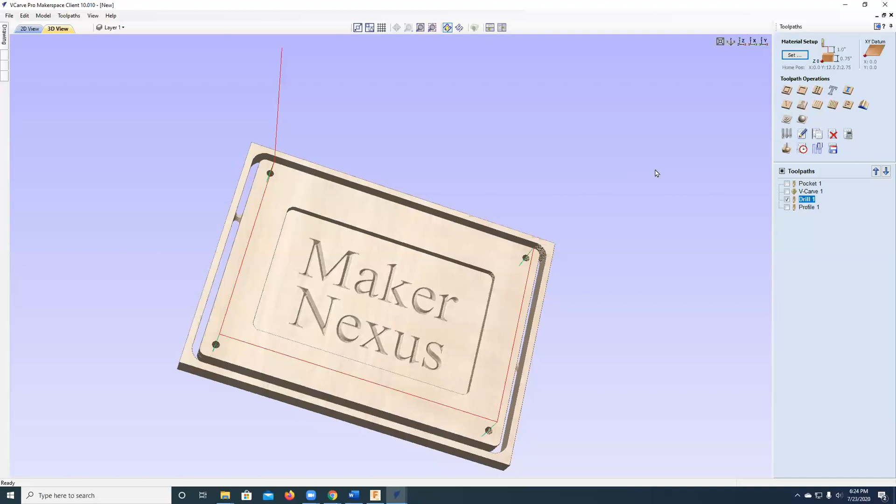All right, going to close that. We're going to start with a clean sheet. This is the splash screen when you download VCarve Pro or VCarve Desktop. This happens to be VCarve Pro.

If you take a look at the top, my version says Makerspace Client version 10.0. Normally, when you go to the help file and say about VCarve Pro, there's a space that says please enter your license code. Instead of a license code, if you enter the Makerspace code for Maker Nexus, which you can get from our Slack or by coming into the shop and copying it down, your copy of VCarve Pro trial version turns into a Makerspace version, which will work for basically forever. However, you will not be able to write tool paths. You'll only be able to create the tool paths, but not write out the code that makes the ShopBot go.

The desktop version of VCarve Pro is about $300 to $400, and the Pro version is $800, and the Makerspace version is free. So depending on your price point and your pain level, you can pick which one of those three you prefer. I prefer the Makerspace version.

Okay, so what we're going to do is a little bit of drawing. First thing we need to do is create a new file. I'm going to click on Create New File, and it's going to ask how big your workspace is going to be. This is normally how large the piece of wood, acrylic, polycarbonate, or whatever you're working with is. For today, let's say my piece of lumber is 12 inches wide, 9 inches tall, and 3/4 of an inch thick. I can work in either inches or millimeters.

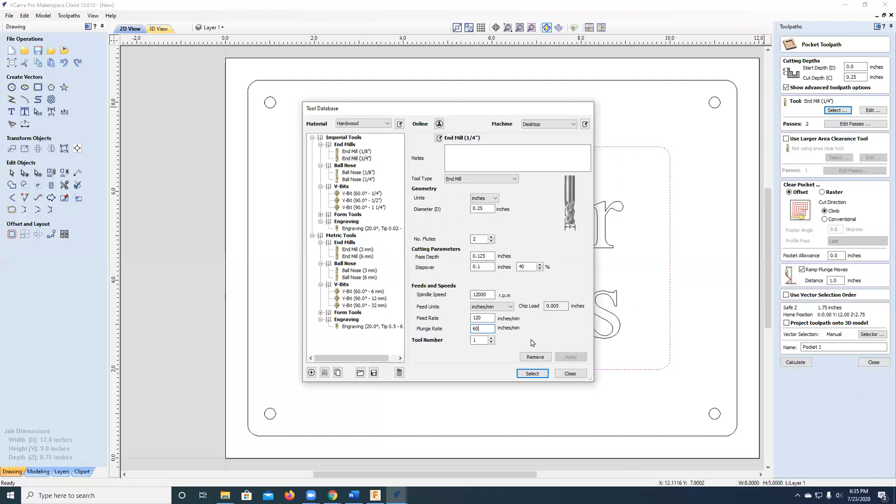Great, I'm going to select. So I've selected my cutting depth and my tool. Notice that it automatically calculates that there's going to be 2 passes. Doing the math in our head, we agree with that.

You have the opportunity to use a larger tool when you're clearing an area. This is an advanced topic we're going to skip at this point.

Next up we have is the strategy we use to clear out the pocket. We can either use offset or raster. Offset follows the profile, the outline of the geometry, and starts in the center and works its way to the outside. Raster goes back and forth, back and forth, or up and down, depending on how you select it. I like offset.

That's what I'm going to use. If you were really concerned, you could do both of them and compare which one takes less time and choose that.

Next section is what's called ramp. We have the opportunity to ramp into the part. So this means that instead of plunging straight down with the tool, I'm going to go at an angle, which again is kind to your tool and makes it last longer.

Okay, down here we have the opportunity to name what it is. I'm going to call it pocket 1 because I'm not feeling very creative today, but we could call it center pocket or clear or text pocket or whatever we want.

When I click to calculate, it goes out and figures out what it's going to do and gives me a graphic representation. Notice we went from the 2D view to the 3D view. Here's my 2D view, and here's the 3D.

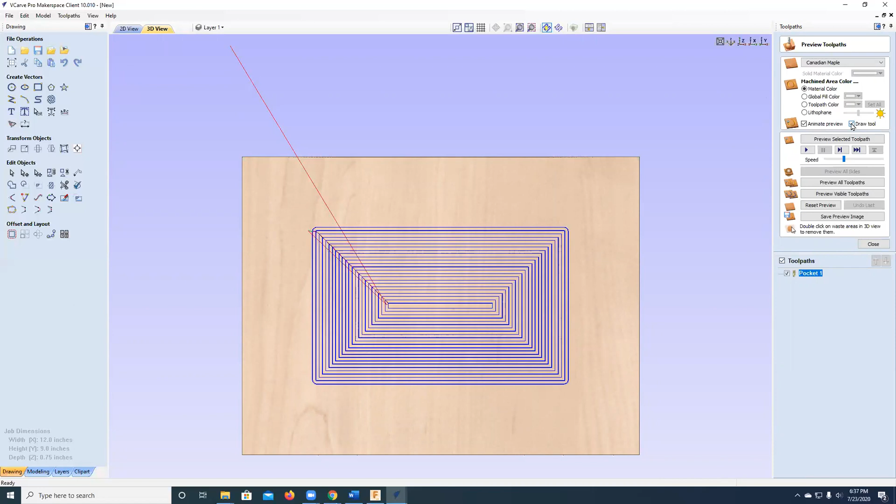And what I can do is I can actually use the simulator over here. It brings up the preview toolpaths submenu. And when I click on the play button right here, it's actually going to show me what it's going to do. I'm going to speed it up because I don't have all afternoon to watch the pretty movie.

But you can see that it clears the whole area and then goes back a second pass a little deeper.

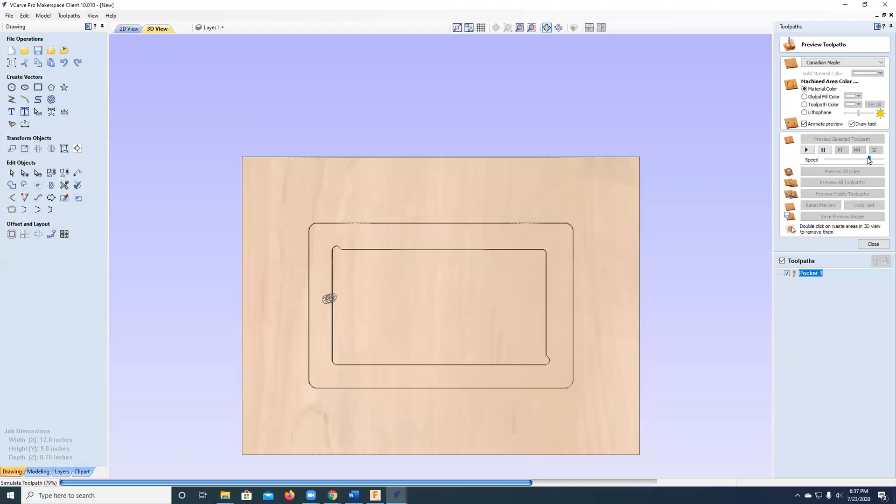Okay, so this is actually a 3D model, so we can rotate it around and take a look and see what's going to happen. That's great.

I'm going to close the preview, click on close, and I'm going to go back to the 2D view because I want to do some more work. I'm going to click on the 2D view.

So the next thing I want to do is I'm going to drill the 4 holes. No, I'm not, I'm going to do the text. We'll do the holes and the outline later. So for the text, I'm going to select those 2 things I want to do. I'm going to select the engraving toolpath.

This time I'm not going to use that square bottomed 1/4 inch tool I had. I'm going to use what's called an engraving bit or a V-bit. They are V-shaped. So I'm going to select, here's what it actually looks like. The one I use is a 1/2 inch wide, 16,000 RPM, 100 - these are reasonable numbers. This is great.

I'll hit select. Notice up here, its start depth defaults to the top of the material, which is not going to work because there's nothing on top. There's a 1/4 inch deep hole where I want to put this text, so I'm going to start down at 1/4 of an inch and let it decide how deep it wants to go. Nothing else needs to be selected here.

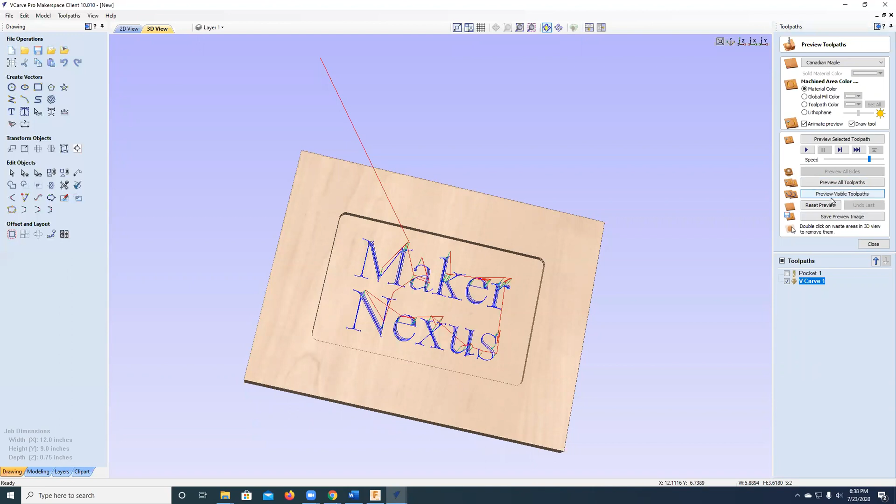Hit calculate, and when I hit preview, it's going to show me what it's going to do. Super, looking good. Okay, we got two of the 4 paths already done. Going to go back to the view.

Next thing I want to do is drill the 4 holes so I can mount my tool. I'm going to hold the shift key down while I select all 4 circles. There we go. This time I'm going to use a drill tool path, which is the 3rd menu item over here. All that does is basically plunge a drill bit, or in my case, I'm going to use an end mill as a drill bit.

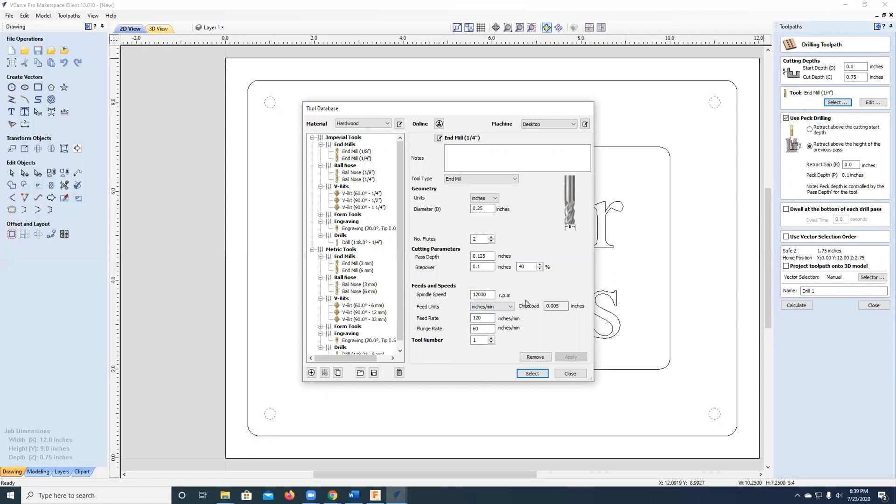So I'm going to use the end mill I used in my first step, and will use in the next step. Same settings, 12,000 RPM - notice it remembered what I set before. I have the opportunity to use something called peck drilling. I can bury the drill in one shot, or I can be kind to the tool and go down a little bit at a time. I'm going to go down 1/8 of an inch at a time, so it'll take about 6 passes to get through the part. That'd be great.

Going to click calculate, and it's going to show me it's going to run around the edge there, and drill 4 holes.

Awesome. Last but not least, I want to cut this out so I can hang it up on my wall. So I'm going to click the outline, and this time I'm going to use what's called a profile. What the profile does is cut either on a line, inside a line, or outside a line. In this case, I want to cut on the outside of the line because I want to keep what's inside the line. I can imagine there'd be an opportunity where I want to make a smaller sign, where I could cut on the inside or on the line, but we are going to cut on the outside.

Notice it's kept my same tool. I'm going to start at the top and go 3/4 of an inch down. I'm using the same end mill. It's going to take 6 passes to go around.

That's great. On the outside, we can add tabs. I will add tabs so that it stays stuck on the material on the bed. So when I click on tabs, I need to actually add them. I'm going to click edit. Shay, where would you like to put them? I think I'll put one on this side over here and another one on this side over here. And I'll say okay.

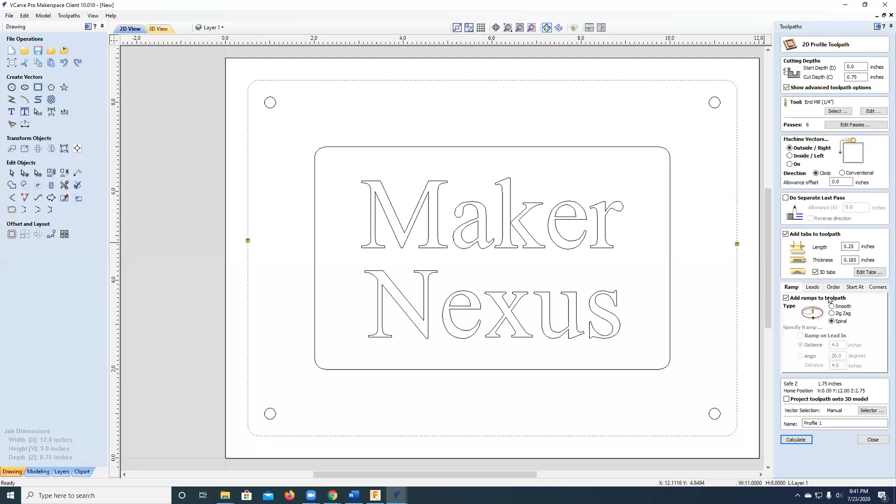Last but not least, I can add a ramp. I can just cut straight down, which will step down and go around, step down, go around. Or if I add the ramp, it'll go in. One of the choices on ramps is spiral, which basically means move down continuously. This is the fastest and the smoothest and my favorite. If I click calculate, it shows me I'm going to go around 6 times. If I click preview, it's going to go around and around and around.

And we see that there's tabs. So hopefully this will stay stuck, and hopefully I left enough material around the edge that I can screw it down to the table without the tool running into the edges.

Great, okay, so the last thing we need to do is save this file. We're going to do File, Save As, and I'm going to call it Sign. So what that does is save the geometry I've done and the tool paths I've created.

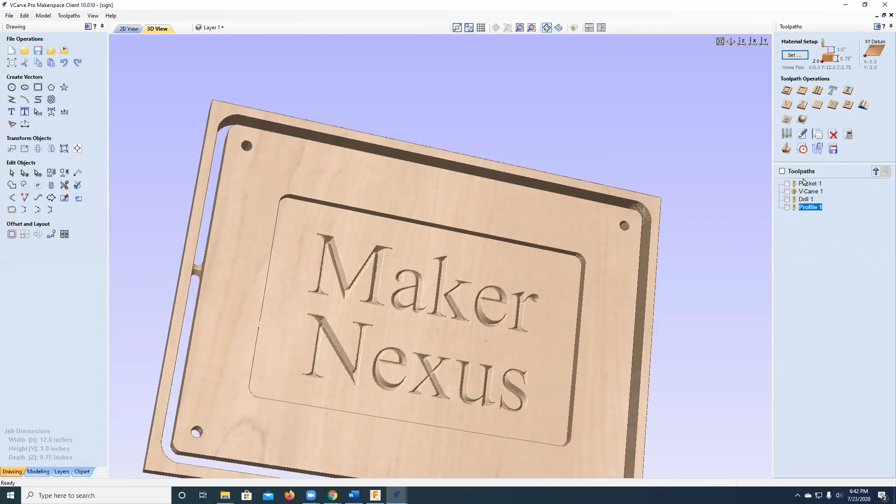Because this is a demonstration version, or a makerspace version, when I try to save my files, it tells me I'm sorry, this is a trial version, you'll have to go to the makerspace. So in the next video, I'll be taking this file to Maker Nexus, and we will show you how to write the tool paths to actually make this on the ShopBot. Thank you for listening.